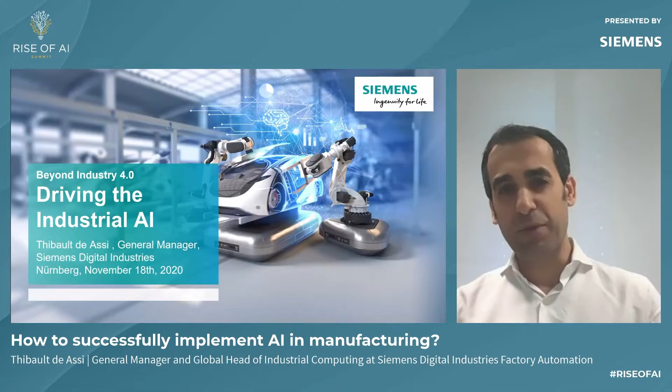I cannot see your faces. Unfortunately, I wasn't able to come join you in Berlin. And I am sure you are wondering how we at Siemens are helping our clients in connecting, in protecting, and in turning data into valuable insights. And to answer that question, I'm here with you today, Thibault de Assi.

When we help our customers in their journey, we really take the time to understand their pain points, to understand the data flow across the whole value chain, and to understand how the operational technology layer is integrated with the information technology layer. And then we bring our hardware and software integrated solution together with our industry know-how and our machine learning experts to answer our clients' challenges.

It all starts with data. There are different data sources on the shop floor. From there, take a look at the circle and take a look at the left side of the circle. From there, we're going to create an AI model. But this is not enough.

Take a look now at the right side of the circle. From there, we're going to create software with domain know-how, including a human-machine interface, helping operators to take the right decision. But that's also not enough.

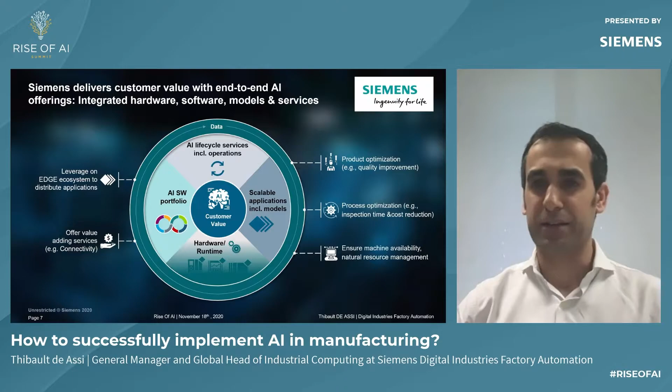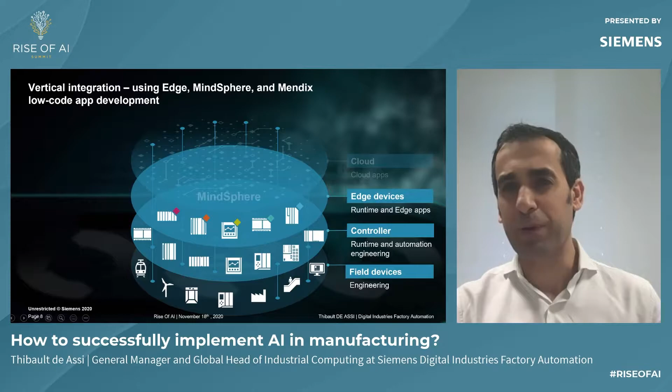Now, take a look at the bottom of that slide. That could be your power plants. That could be your production machine. That could be the elevator that takes you to the Berlin conference or to your home this morning.

On top of it, we have what we call the control layer. This is where the industrial PCs or the PLC, the controller, are controlling those field devices. Then we have our edge layer. For us, edge is not a simple gateway. For us, edge is about connectivity. It's about openness, it's about local data pre-processing.

It's also about data and security, because security is at the heart, at the core of our product portfolio. And it's about machine learning and artificial intelligence.

The layer above is the cloud layer. With our platform MindSphere and with Mendix, we are offering our clients an efficient way to develop their own industrial IoT applications and deploy those applications in the OT, on the edge layer.

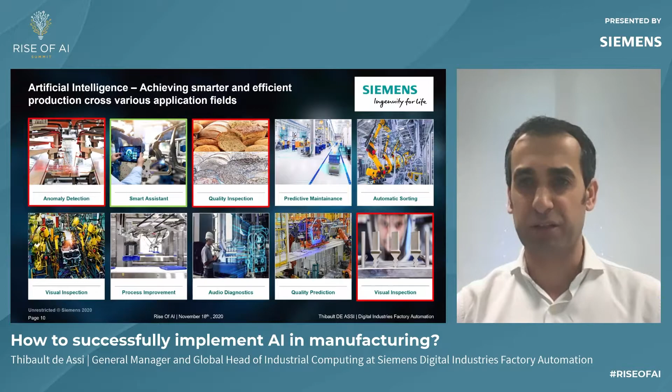Let's take a look at some of those use cases that we have been implementing in the industry. The first one is about defect prediction for die casting.

Today, our customers are inspecting the parts at the end of the line. He's looking at the part manually, or he is using automatic optical inspection. He is scrapping more than 10,000 parts per year, with a defect rate between 2 to 4%. At other customers, it can go up to 10%.

What we have been doing here is identifying key process parameters affecting the throughput of the die casting machine. We build an AI model and deploy it on our edge devices to make real-time anomaly detection and defect prediction, feeding that result back to the PLC to prevent further production of defective parts.

It helped our customer to further reduce process costs and defective products by 30%, and managed to optimize the process and decrease the defect rate by 40%. And I am sure in your own words, you also would like to have such savings.

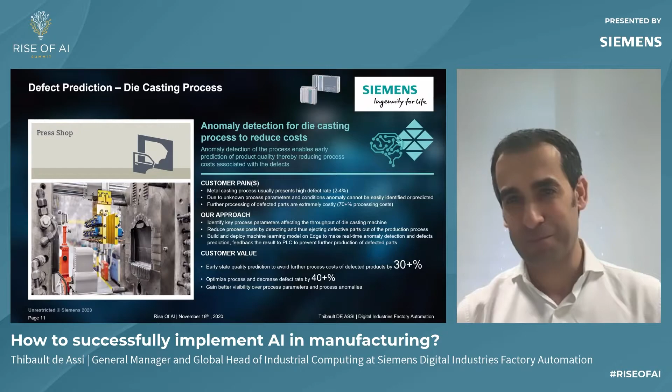Let's have a look at the architecture. We are collecting data with our SIMATIC S7 controller, shown on the left side of the screen, along with additional data coming from the quality management system and other sources. This data is fed into our edge platform that runs on our edge devices.

There we have our trained AI model for clustering and classification purposes. With the data, we also have storage, and from there, a dashboard. This is where the operator can observe the data to make decisions that would impact the die casting process.

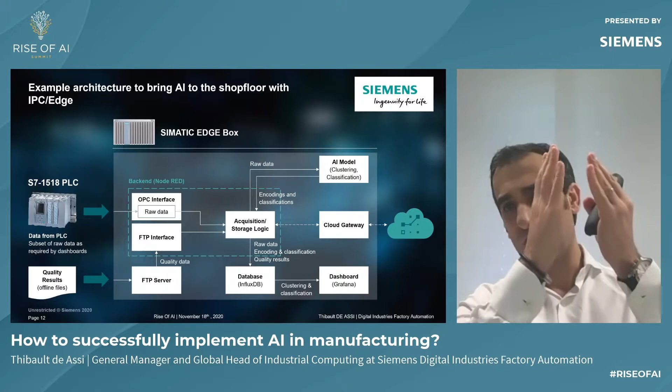We also have a cloud gateway to send the data to the cloud for data storage, further statistical analysis, training purposes, and later on deployment.

The second use case is coming from the bakery line. It's about visual quality inspection. The baked product is ejected out of the oven on a conveyor belt down to the packaging line.

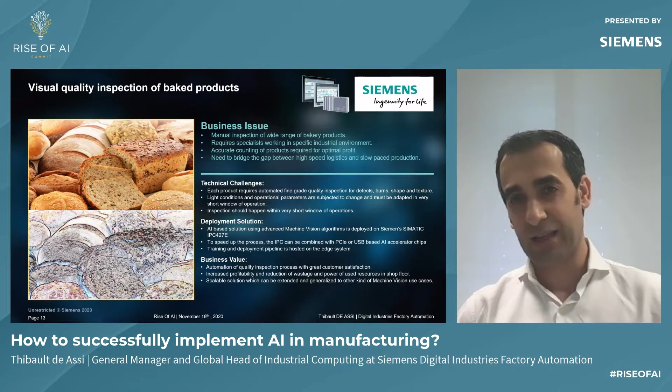Today, our customers are counting the baked items manually. The defects could come from the degree of burn or the size and shape of the items. So what we have been doing is implementing an imaging system to get a near accurate count of the baked items and localize the defects that might happen after the oven.

This data would be sent to the IPC, where we have our AI model running, and through the HMI we would be able to see if these baked items have good or bad quality. It helped our customer save time in inspection, reduce inaccuracy in the counting area, and reduce defects.

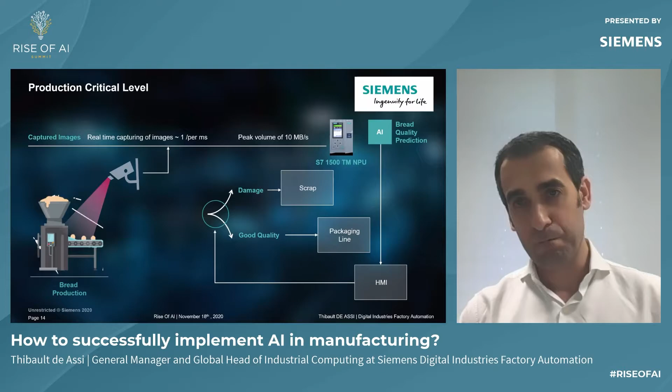The third use case is about visual inspection in additive manufacturing. Jet Binder 3D printing is the additive manufacturing technology for making or printing a product out of a digital file or a CAD file.

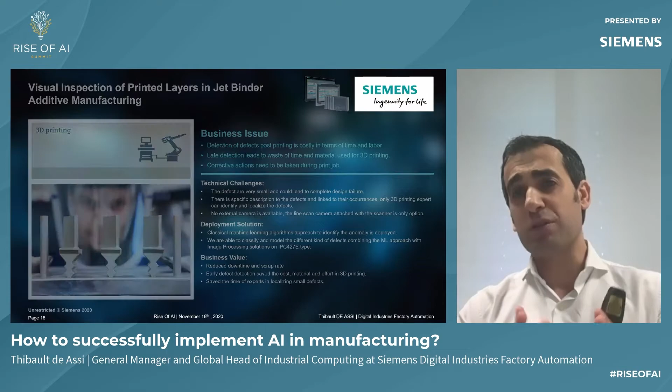This process could go up to 2,500 layers per job, and could last 30 hours to get the product printed. What we have been doing here is implementing a vision system to detect defects layer per layer.

In case of defect, it triggers a stop signal for the printing machine. The operator could take out the product, take some measures, either put it back or discard it, and run another manufacturing cycle. It helped our customer reduce time and rework by around 2.5 hours per day.

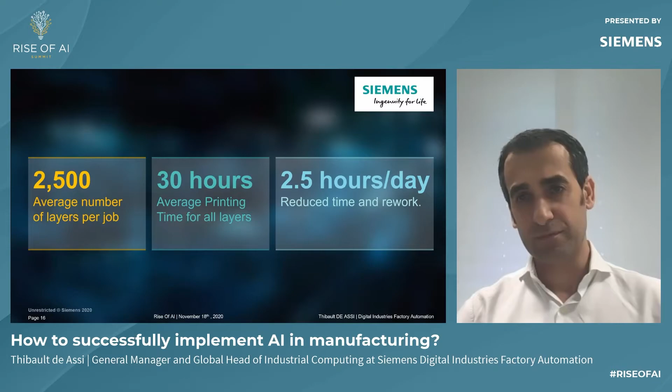The fourth use case is about failure prediction for automatic guided vehicles. Today, at this customer, AGVs are being charged at the end of the manufacturing cycle. One stop of a single AGV results in 500 euro per minute in production cost.

Our approach was to analyze AGV alarms from the reports, getting data from the charging stations, and develop an AI model to predict accurately when maintenance has to be done. This helped our clients avoid stops in operations, reduce production costs, and optimize the charging processes.

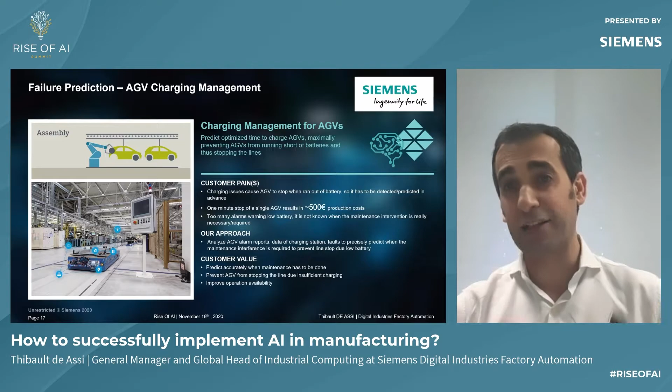Here you have, from an architecture standpoint, how this would work. We have the AGVs, they have a controller. We collect the data from the AGV controllers. This data will be sent to edge devices, where we have our AI model running, a monitoring system that provides the information on when we have to send the AGV to the charging stations.

The fifth use case is about process optimization. It's about improving beer quality. I'm sure you love drinking beer. I do.

Today there is a kind of inconsistency per batch. Process parameters are influencing the beer quality at the end of the line. There is a kind of beer sommelier after packaging who tests the beers and assigns grades, and the minimum grade has to be 6.8.

What we have been doing is identifying key process parameters influencing beer quality. If you look at the overall process, we have raw material, brewing, cold block and fermentation, packaging, and quality check. Parameters like time, pH value, alarms, yeast type in the fermentation area, dosing data in fermentation, quality, energy, and so on. These are the parameters that have a huge influence on the manufacturing processes.

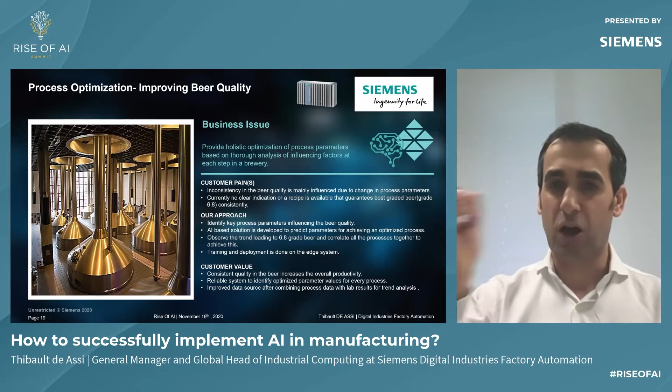We develop the model and train that model on the edge, as you can see here. This helped our customer improve and optimize his processes, but also improve the quality of the product coming from its own supplier.

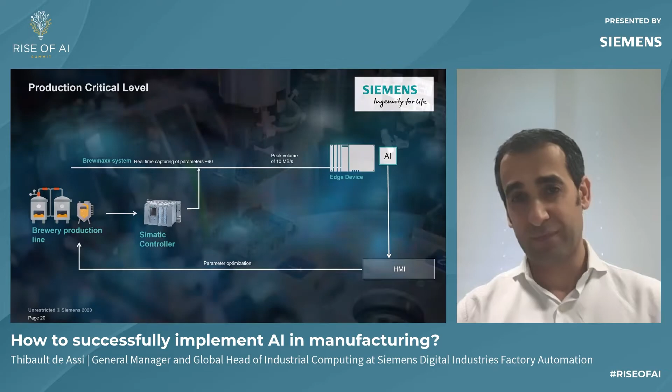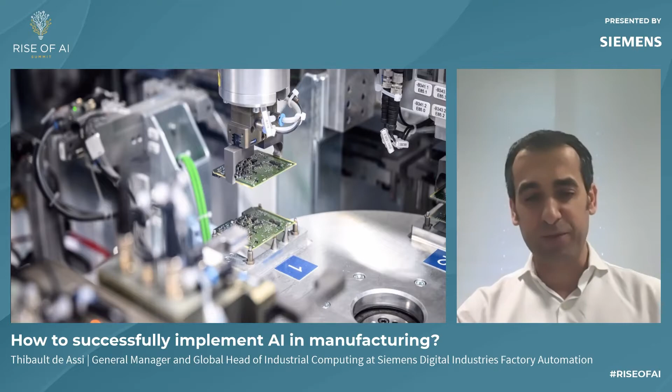The last use case is coming from our electronics plants, from our Amberg plant. Today, to inspect PCBs, we are using a very expensive machine, X-ray machines.

What we have been doing there is gathering data from the different process areas in the PCB manufacturing plant: from the solder paste printer, from the solder paste inspection, from the pick and place machine, from the ovens, from the automatic optical inspections.

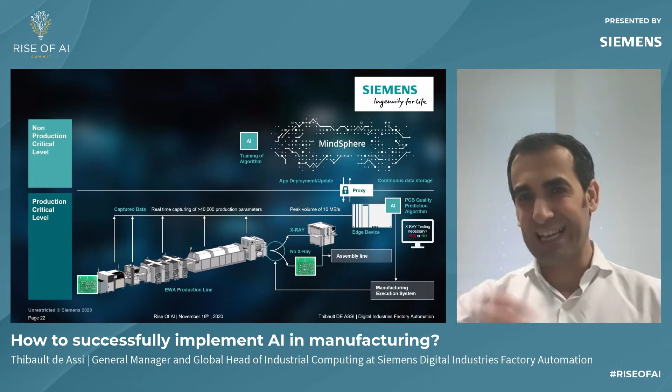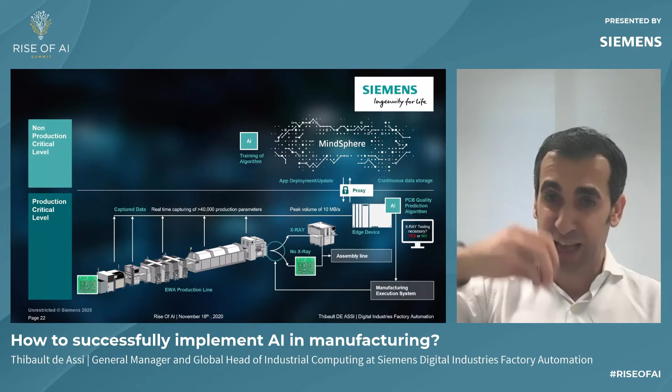We developed the AI model. Data is being sent to our cloud platform, to our MindSphere. This AI model is trained with a software application deployed and run on the edge, and there we are able to predict the quality of our PCBs.

It helped us achieve 30% fewer X-ray tests. It helped us achieve a 100% quality rate and reduce our capital investment by €500,000.

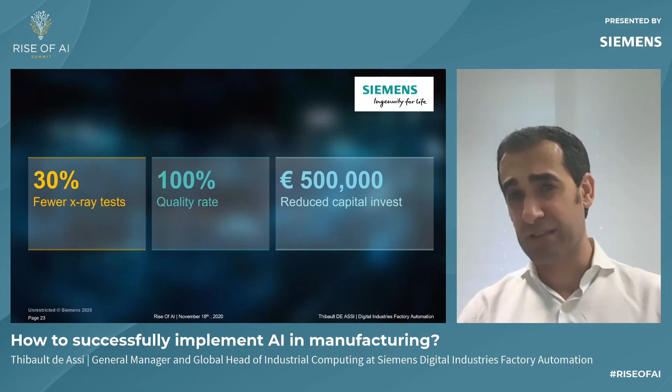We have our software and our industrial-grade hardware to help our customers deploy and run those use cases. From the ultra-compact, fanless device you see on the left side of the screen, this is where we have been running our additive manufacturing use cases.

The embedded device is where we have been running our AGVs, and the high-end device, when it comes to real-time quality inspection for high-end images or for training data on premise, this is where you would require such powerful devices.

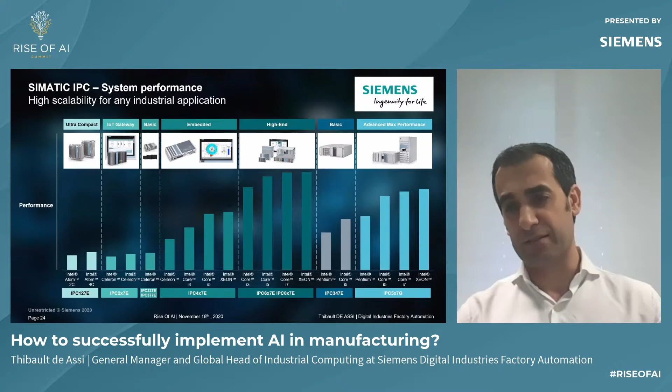AI is one of the major breakthrough technologies in our century. AI enabled us to trigger tasks that human beings were not able to do before. AI is providing the right information, the right data to the operators, helping them take the right decision.

How do we imagine AI in 2030? I do see smart assistants, those smart assistants getting data from different sources, from operational technologies but also from information technology, providing that information to operators to perform efficiently and take the right decision on the shop floor.

I do see AGVs optimizing routes by themselves within the factories. I do see more and more factories going into autonomous factories. I do see robots with more vision-embedded systems with AI technology, able to handle different parts and different geometries.

So AI will bring a lot of productivity, efficiency, and developing our own people, to put us at the next level in terms of manufacturing and in terms of industry.

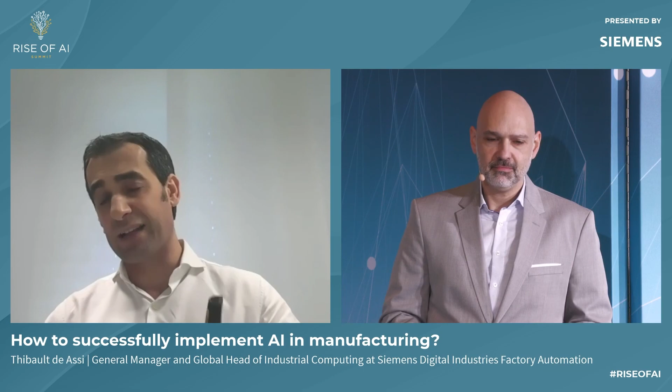I would say it depends — it depends from customer to customer, industry to industry. For some of the customers, or some of the use cases I highlighted before, we see a payoff after a period of between 6 to 12 months. It all depends. For us, our approach is really working together as a partner with our clients — we need to align on expectations, align on KPIs, and bring knowledge from both parties in order to achieve that return.

Thank you very much. So let me pat you on the shoulder, Thibault, thank you very much for your talk. I hope you have a lot of success convincing people, but with that much energy you have, it won't be a problem at all. Thank you very much. Thank you so much. See you hopefully next year on stage. Thanks a lot, have a good day. Bye-bye, au revoir.